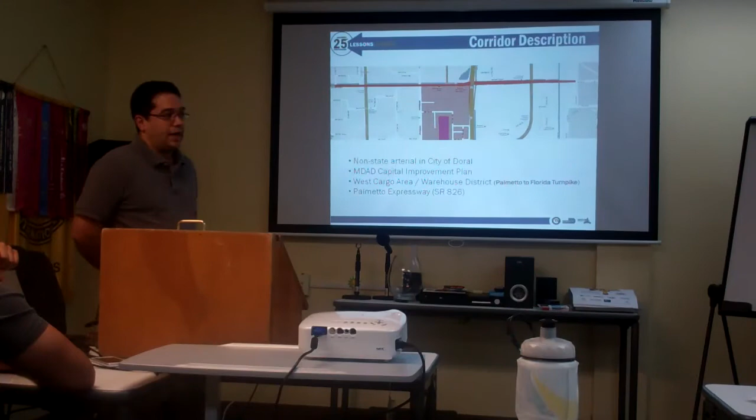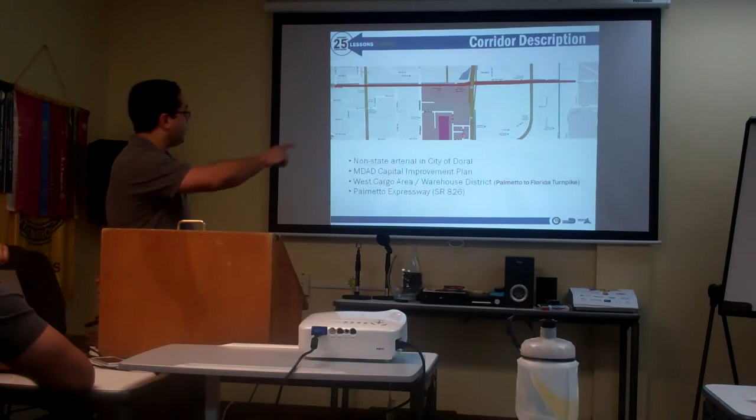That project is located in the city of Doral, and it's what we consider a non-state arterial. Originally the project started at the county level, and it was moved up to the State Department of Transportation for construction. It will serve the west cargo area at Miami Airport and connect it to what they call the Warehouse District in the city of Doral.

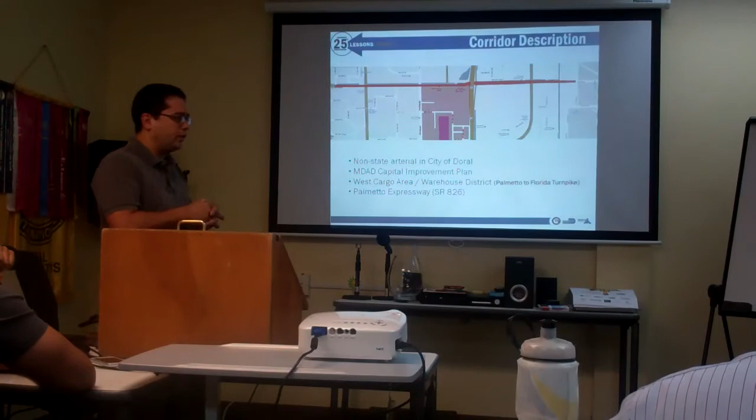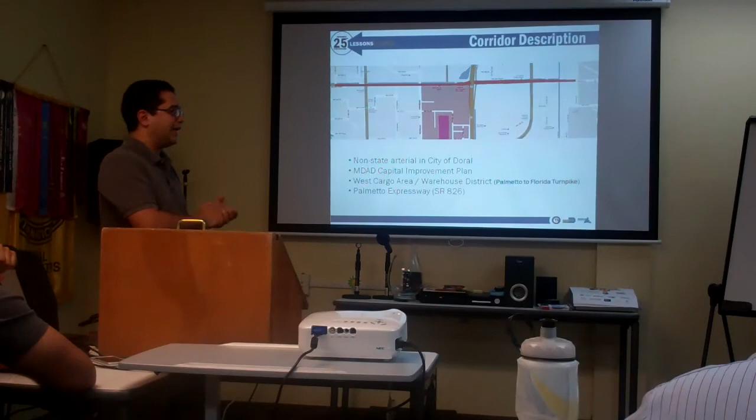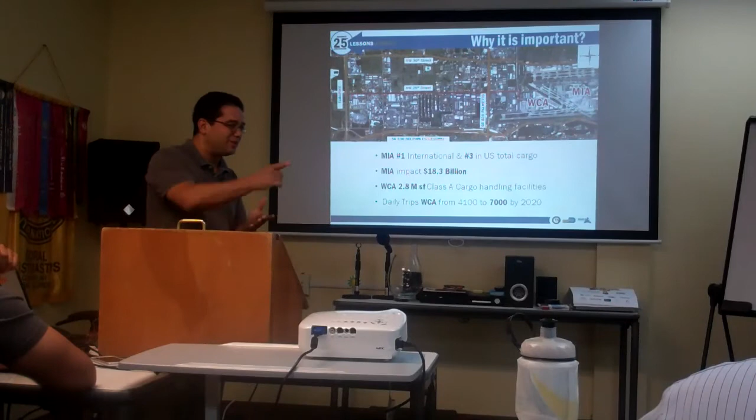Why is this important? Miami Airport is the number 1 airport in terms of international cargo, and number 3 in total U.S. cargo. Miami International Airport has an economic impact of $18.3 billion.

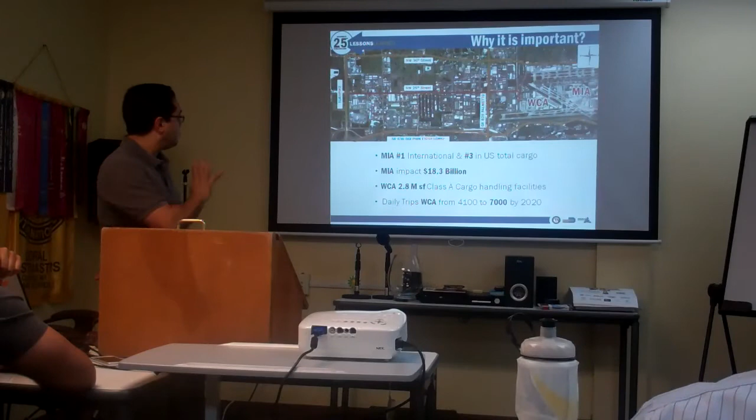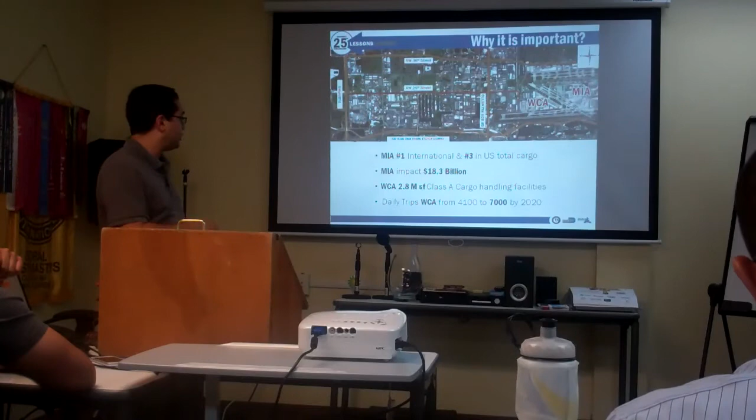The west cargo area, adjacent to the airport, has 2.8 million square feet of Class A cargo handling facilities. The daily trips entering and exiting the west cargo area will be about 7,000 by the year 2020.

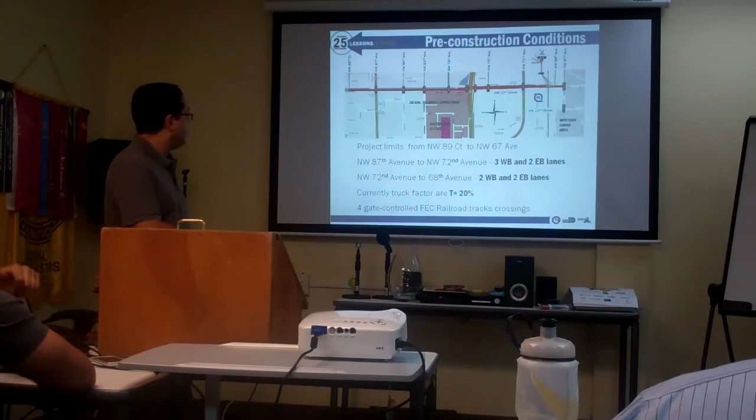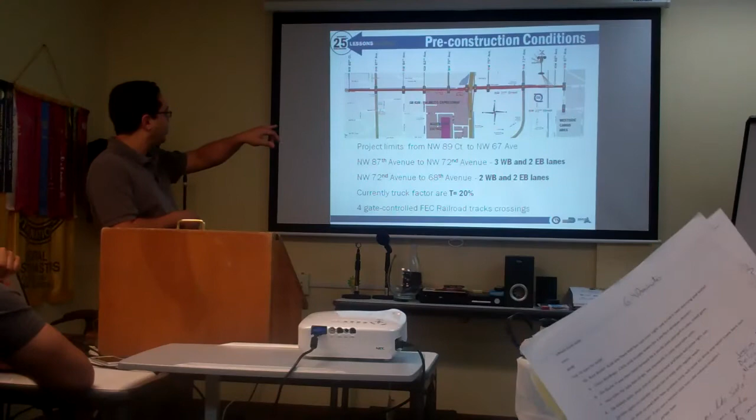As for the limits of the project, many are probably wondering where that bridge to nowhere will go. It will begin at the west side cargo area and end at Northwest 89th Court.

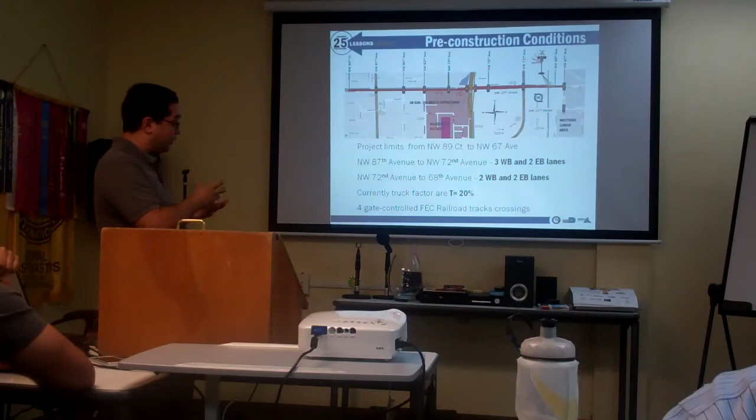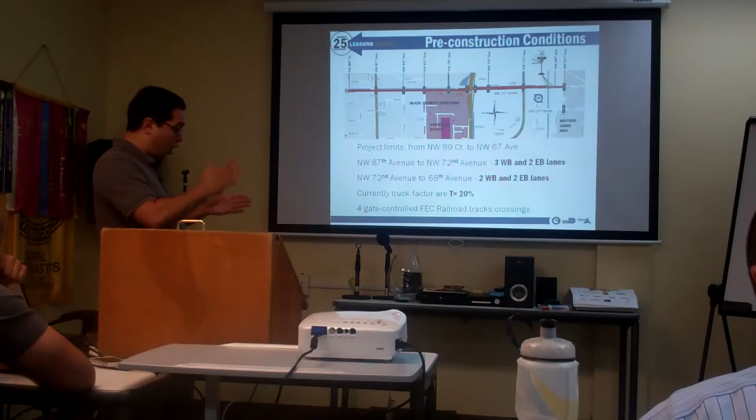Currently, truck traffic in this corridor is 20% — 20% of the traffic in this corridor are trucks. Prior to the bridge being constructed, and after as well, there are 4 gate-controlled FEC railroad track crossings.

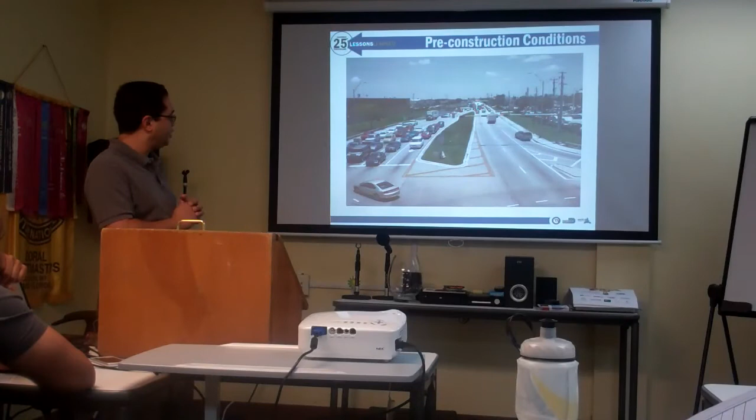This is a picture of what it looked like before construction began. This is the west cargo area at the airport, and this is just traffic information.

The current year was 2003 when we started the project. The projected volume of traffic along the corridor will be 55,000 cars per day, with 20% being trucks.

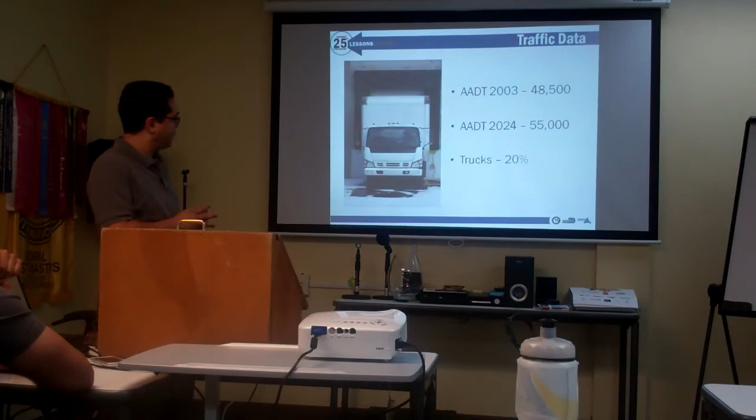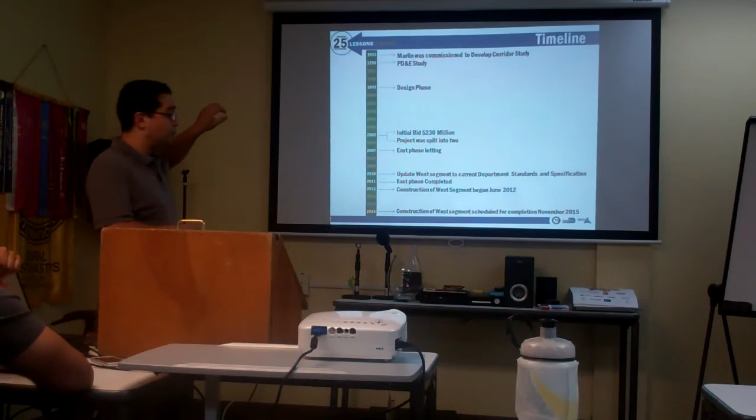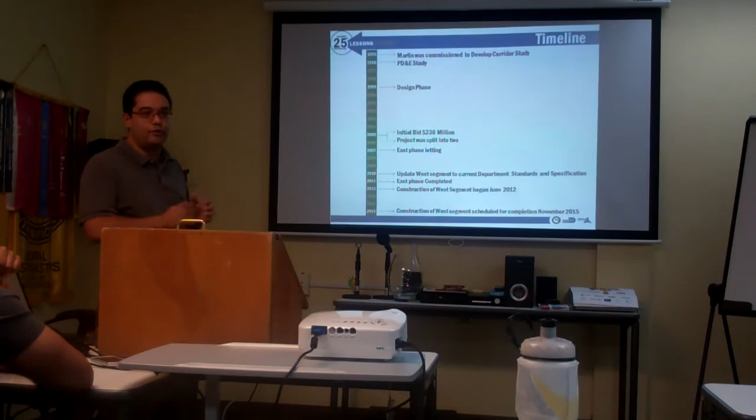This is just a timeline of how the whole study developed. The project actually started in 1995. It takes about 15 years for a project of this magnitude to be studied, approved by the federal government, and constructed. We anticipate finishing this project in the year 2015.

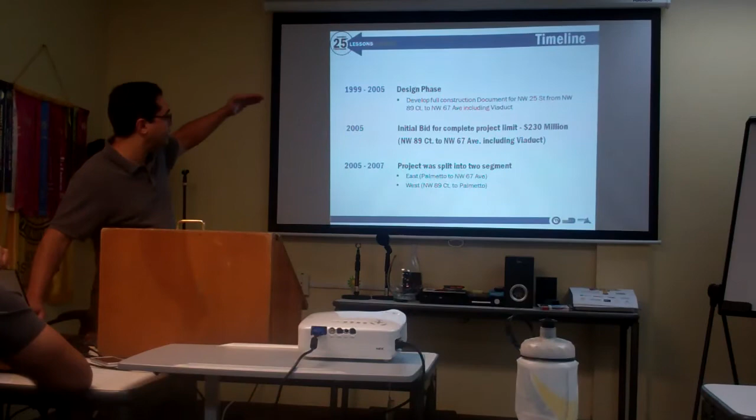These are just details of all the phases we went through. We went through the study phase, the design phase, and now we're in construction.

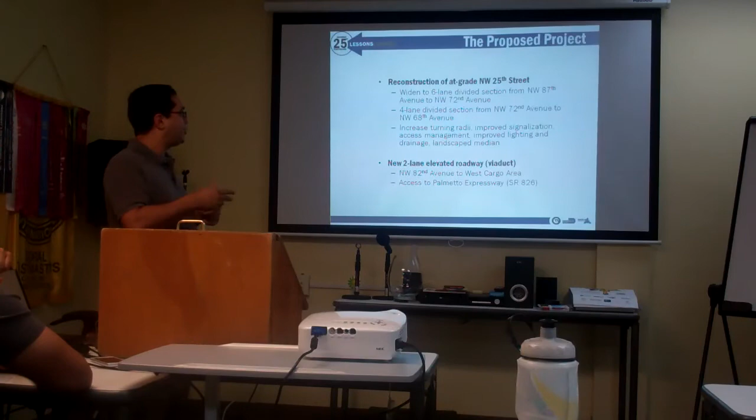The proposed project is actually comprised of 2 major components. One is an at-grade improvement, meaning the roadway will be widened from 3 to 6 lanes, from 72nd Avenue to 87th Avenue.

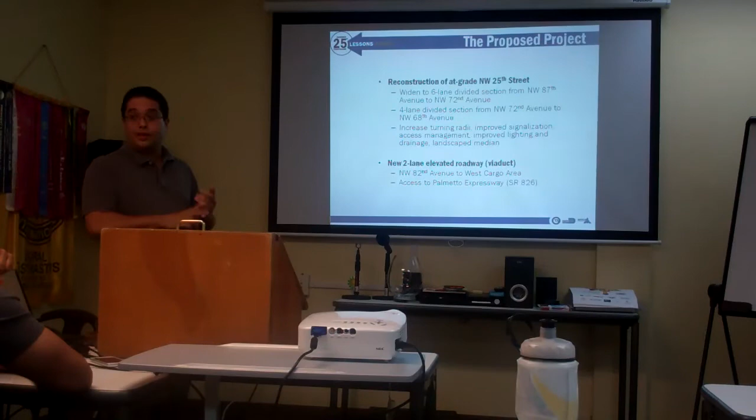The improvements we're going to be implementing on the road at grade include improving the way cars and trucks turn at intersections, adding new signals, and improving access management, which means minimizing the amount of median openings and driveways. We're also going to be improving the lighting and drainage, and providing landscaping for the city of Doral.

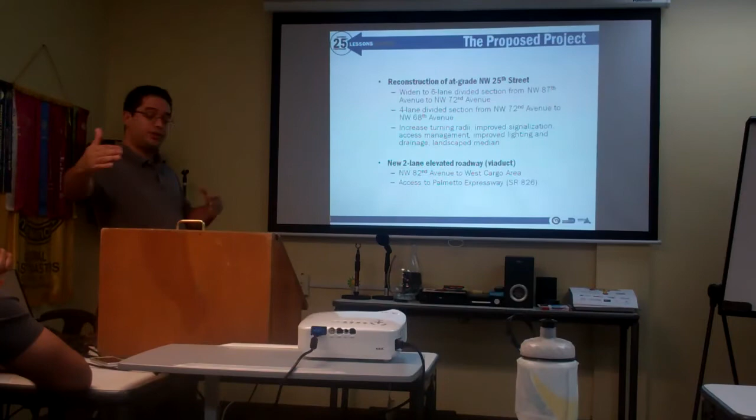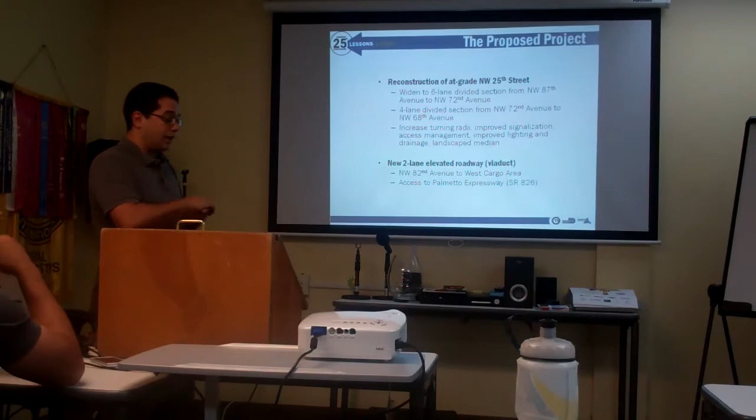The other component, which is the major and more visible one, is the viaduct, which is the bridge. That bridge runs in the center of the roadway, from the West Cargo area to the 82nd Avenue intersection. You've probably been hearing that folks want to extend that bridge all the way to the Florida Turnpike.

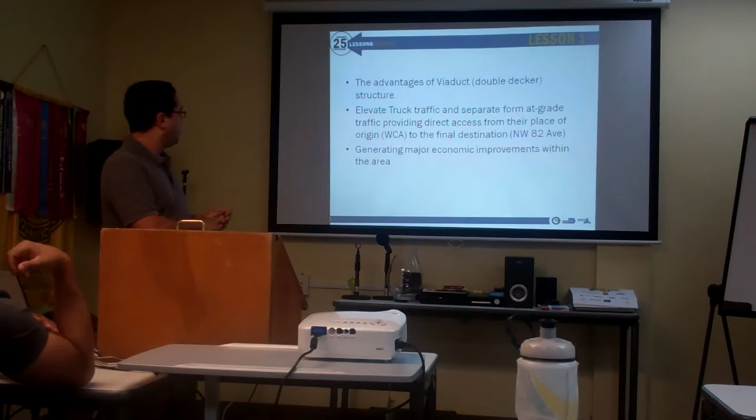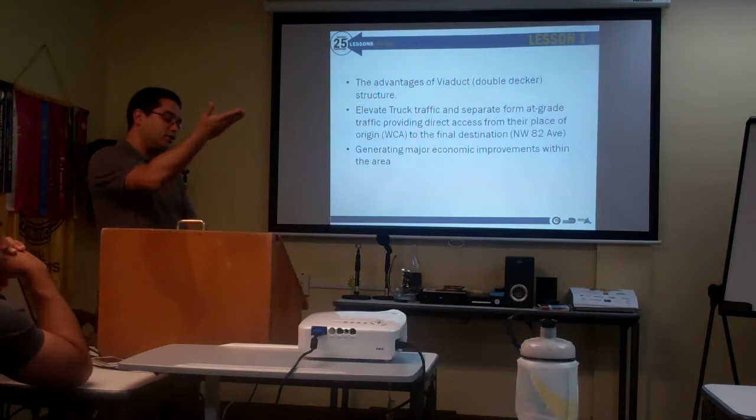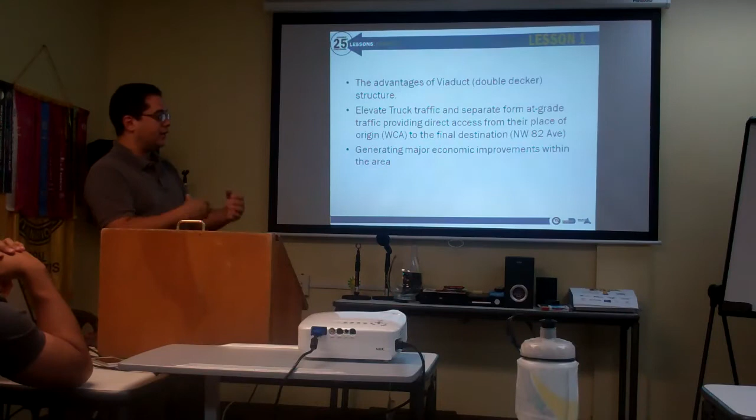The first lesson we learned on this project is that there are advantages to having a double-decker structure, as they call it. Basically, we're separating all the truck traffic from the at-grade regular traffic, which means that as a motorist you won't have to deal with heavy truck traffic weaving and affecting the flow of traffic. We're also going to be generating major economic improvements in the area.

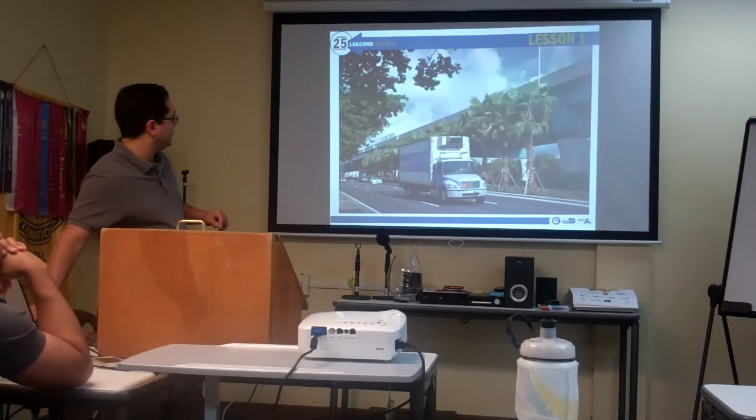This is what it looks like now. The current status of the project is that the east project has been completed—that's the Bridge to Nowhere—and the west project is underway right now. It began in June and is scheduled to be completed in 2015.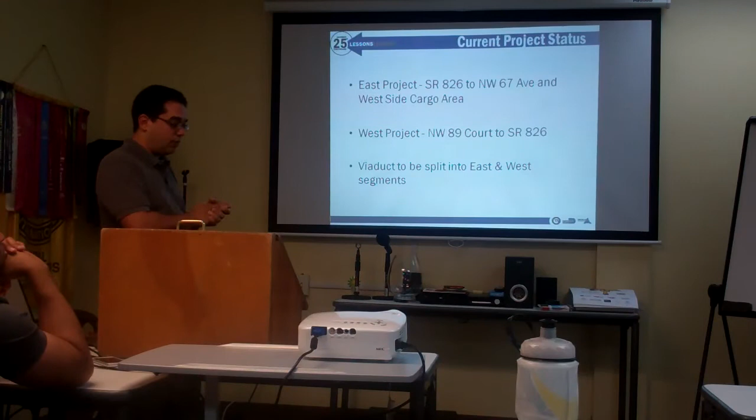The viaduct was split into two segments for a couple of reasons: one, to minimize the cost, and the other, to simplify the construction impacts on the motoring public.

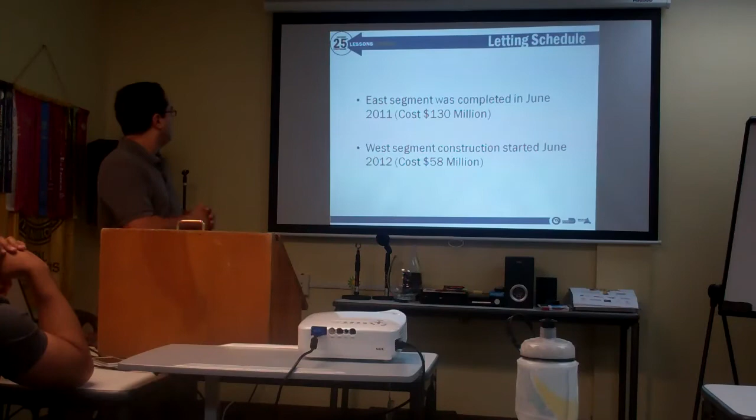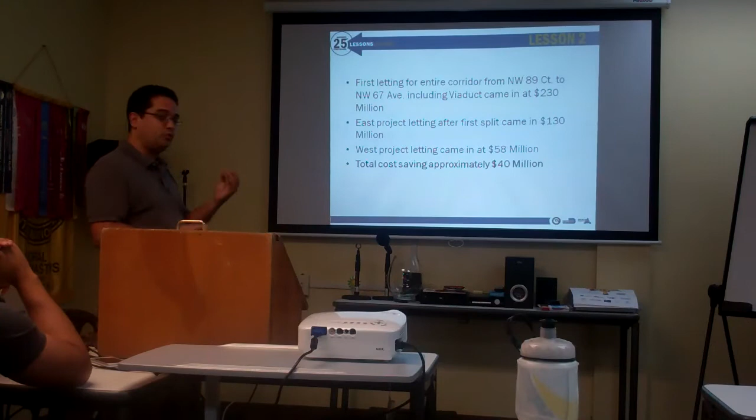This is the cost of each segment. The east segment was $130 million, and the west segment was $58 million. The second lesson was that a project of this magnitude is better off being split into two, because you get two different contractors bidding and more competitive pricing. So we were able to split the project and save the state $40 million.

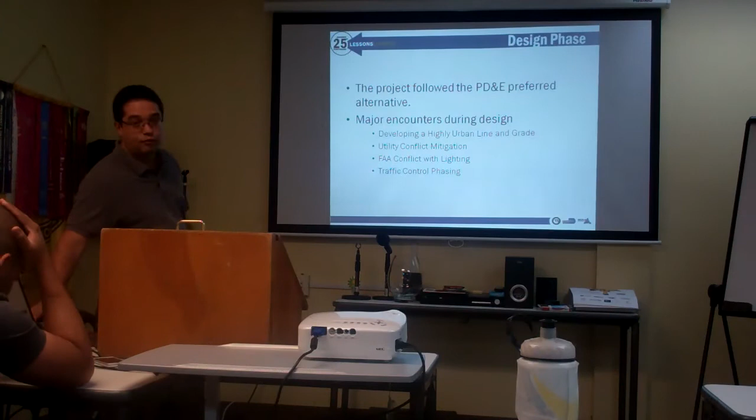These are some of the issues we encountered during design. We had a lot of utility conflicts, conflicts with the FAA, major coordination issues, and multi-agency coordination that we had to perform.

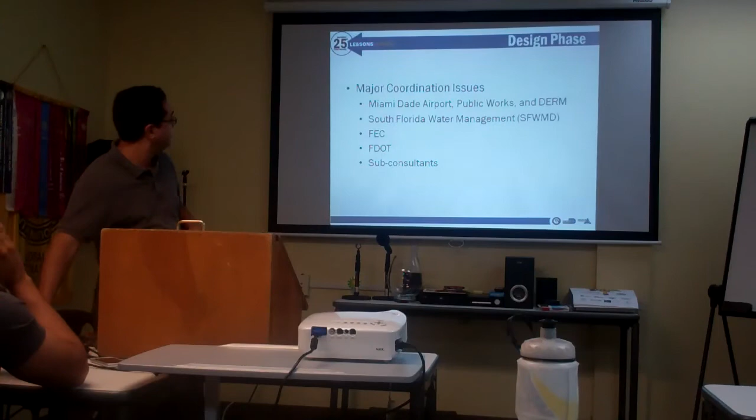The construction team was comprised of the contractor, the DOT, and Marlin Engineering consultants. It's a multi-team effort.

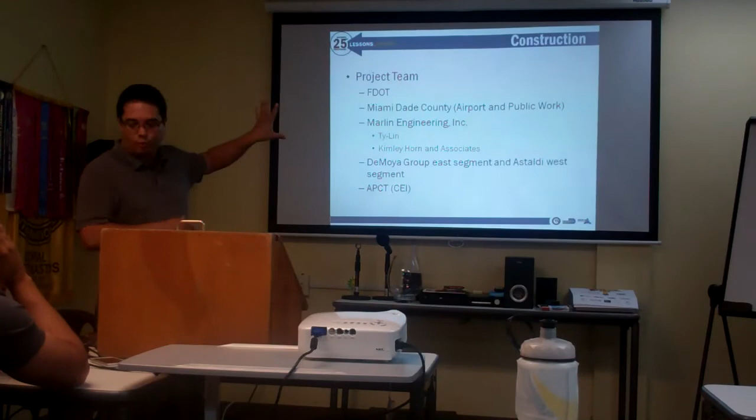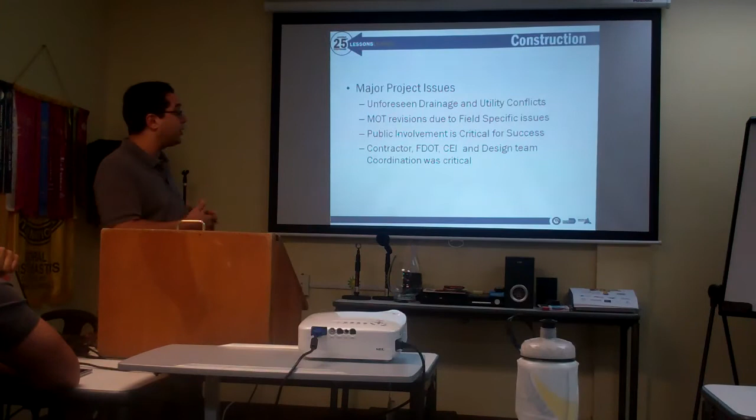Project issues encountered during construction included unforeseen drainage and utility conflicts. We had to revise the MOT based on complaints from the city and the motoring public. We also had a major public involvement program informing the public that this job was happening, and during construction we stayed involved with the public.

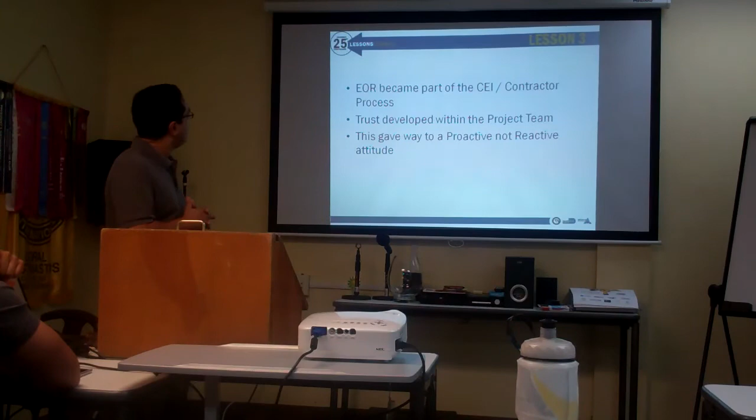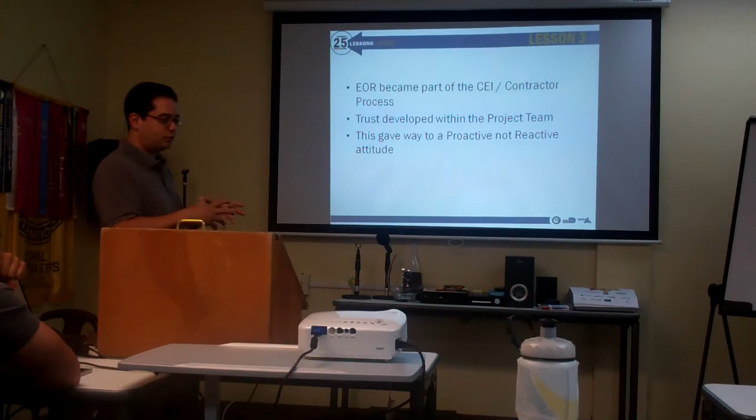The third lesson is that the engineer of record, Marlin Engineering, became part of the construction process. We developed a team, a partnering relationship, and trust within the project team. This helped accelerate construction and gave way to a proactive attitude rather than a reactive one.

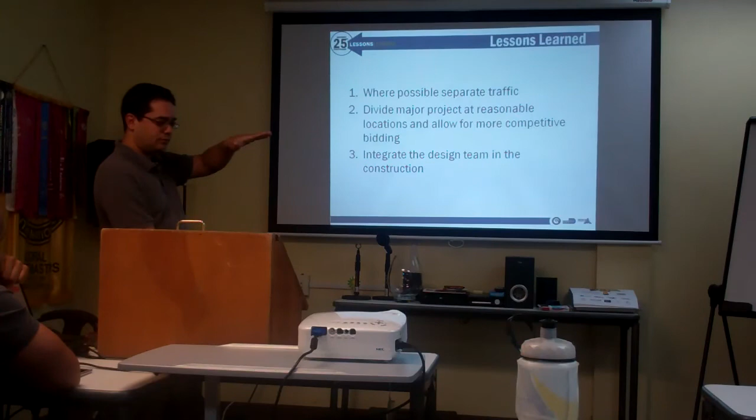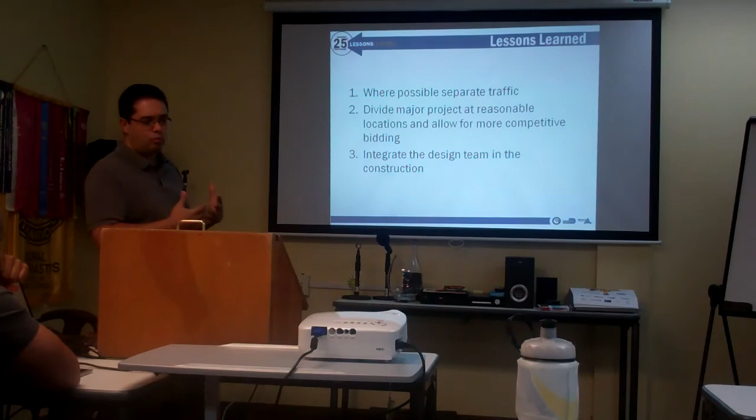To summarize the three major lessons learned on this project: where possible, separate traffic—separate the truck traffic from the at-grade traffic; divide major projects at reasonable locations to allow for more competitive bidding, which saved the state $40 million; and integrate the design team into construction, creating a partnering atmosphere so construction goes faster. That's my presentation.